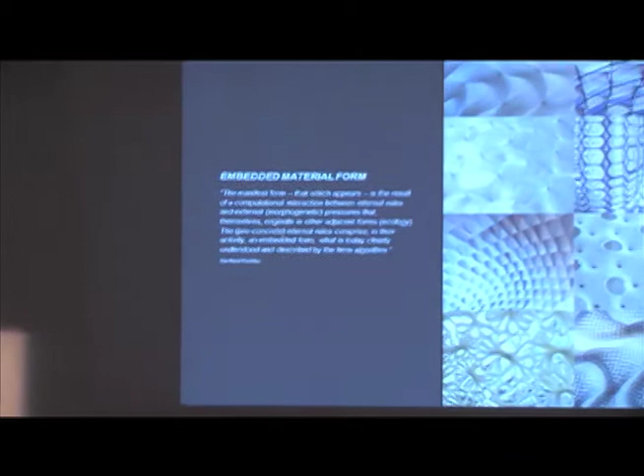Anyways, today I'm going to talk mainly on the particular research that I've been conducting at various institutions over the last couple of years, with the focus on investigating processes of design computing that are synthesized with physical materialization, in order to understand how we can use what Sanford quite nicely called in this quote the embedded form, which is the latent material gestalt in any kind of material system that we deal with, as a starting point for the design process.

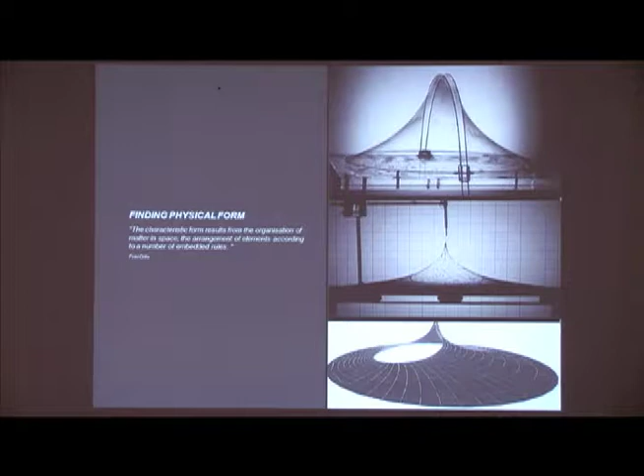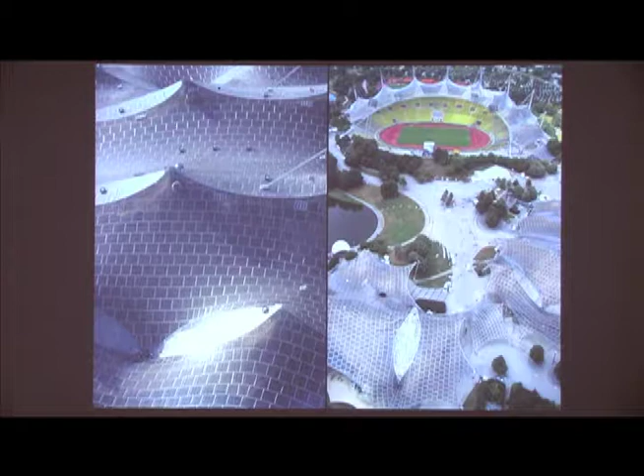Of course, at Stuttgart University, that kind of design approach, starting with the physical rather than with the digital or the imagined, has a prominent history. The most well-known person researching at Stuttgart University was Frei Otto, investigating how you can use physical behavior and the self-forming capacities of material systems as the base for a design process. Most famous are probably his soap bubble experiments, where he uses the inherent tension within the soap films to find physical shapes that at the end were at the base of his probably most famous building, the Olympic Stadium in Munich, constructed and designed in the early 70s.

So what we are interested in doing is seeing how we can extend such a design process, which conceives of form as something that comes from within the materials, something that we tease out of those materials as we allow them to have a say in the structures we create, as it is nicely put in that quote, by contemporary means. That means that we try to embed in the generative design codes that we use the physical material behavior from the very start, and also link into that the possibilities and constraints of contemporary manufacturing processes.

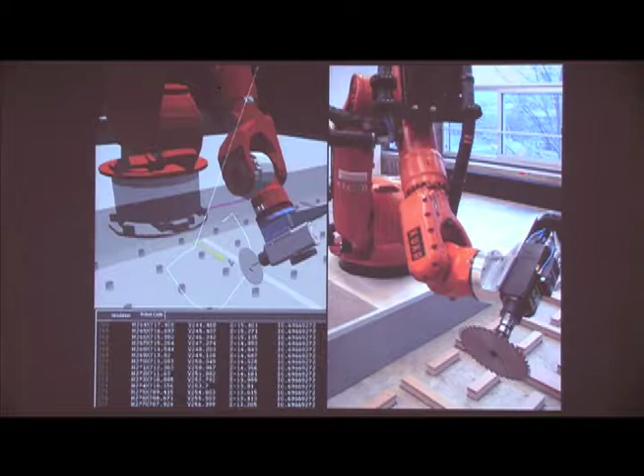So the idea is that you create something that one could call a morphogenetic design approach, in which the genotypic information is determined by the materialization constraints of the systems, and then in exchange with external influences, such as the structural forces acting upon the system or the environment interacting with the system, you can unfold a very particular material gestalt.

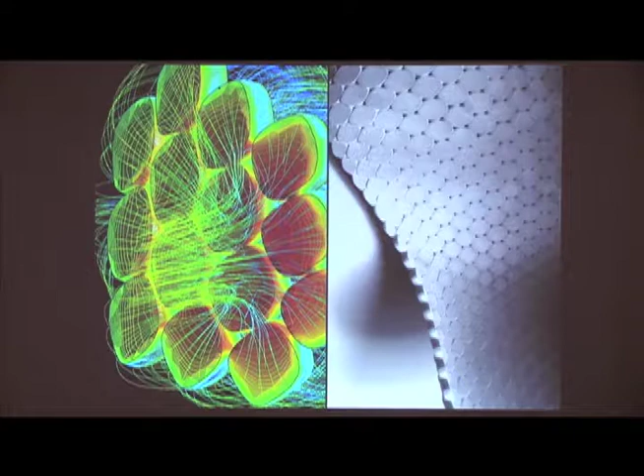Now, we've investigated this kind of design approach in relation to fiber composites quite a bit, and we did that in this particular case with the manufacturer of these kind of knitting machines. There are only two manufacturers that can build these knitting machines, as I am informed. One of them is quite close in Germany, and they produce these materials, which is a warp knitted spacer textile. So it's a kind of three-dimensionally woven textile.

And we investigated the capacity of that textile, while being absolutely non-elastic, to be capable of draping over very complex three-dimensional curvature, double curvature, without the need for any cut patterns, and still with full structural capacity. So we investigated that behavior, which is mainly driven by the spacer yarns, came up with a mathematical description of that behavior, which then is part of the generative design code, from which we can extract a manifold number of possible material gestalts, and also programmed an embedded simulation tool to see whether the local and the global stretch is feasible.

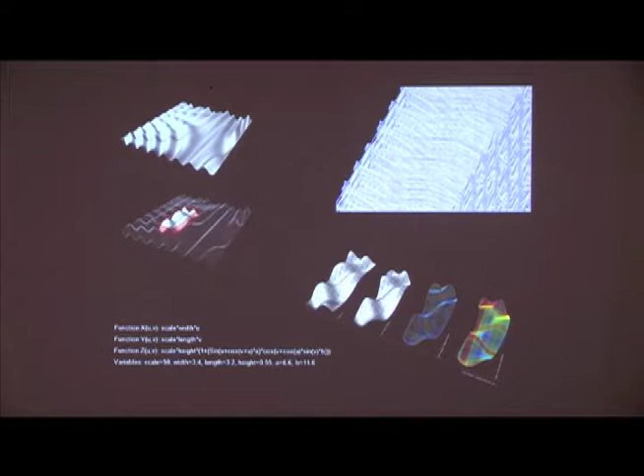And with that, we were able to construct a number of actually quite complex monoshell kind of constructions like this furniture without actually the need for larger formworks. It's just all driven by the material behavior itself. A number of kind of more complex arrangements, a number of shells bonded together. Here you can nicely see how the kind of microstructure actually determines the shape of the macrostructure.

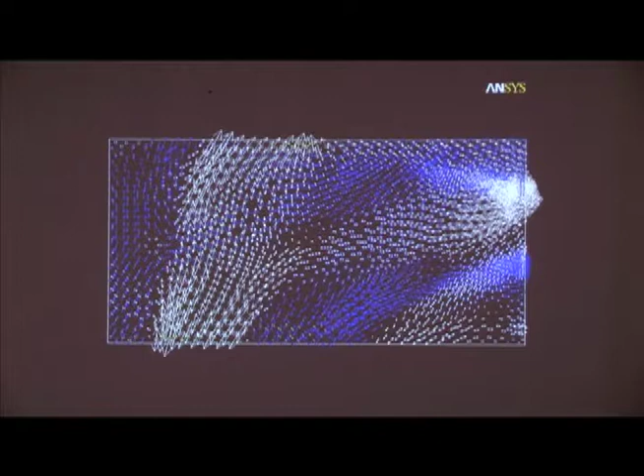And then we went on to also intervene within the construction of the material itself by embedding additional threads that, by simply pulling them, allow the material to self-organize in fairly complex fashion. And if you calibrate that with the forces traveling within the material, you can actually create highly complex, very articulated composite structures, which are as simple to construct as just pulling a couple of strings. The rest is just happening by the material itself, and still forms, mainly due to this kind of secondary undulation, incredibly stable and stiff shell structures.

And the same principles also work if you have a closed, completely watertight composite skin on the one side. So what makes composites interesting for us is you have a hierarchical build-up. You actually blur the boundary between constructing a structure and constructing the material. And you can actually design the behavior into the system.

So in order to be a little bit provocative, I thought I'm going to talk about a different composite today, which is probably the oldest composite we know, and that is wood. Nicely stated by Frank Costin, wood is God's own composite. You wonder, who the hell is Frank Costin? That's the guy that actually designed plywood airplanes in the Second World War, then went on to design race cars with plywood chassis that were actually pretty successful in Formula 2 racing. So he knows a little bit about wood.

What is interesting about wood is that it's actually pretty much a high-performance natural composite system where the cellulose microfibrils are the reinforcement and the lignin is the matrix. Unfortunately, we've lost most of the understanding of how we deal with this high-performance composite due to industrialization, which dumbed wood down to being a dimensional building element. I think in this country it's emblematic that you don't even call it wood, you just call it 2x4, which is not relating to its anatomy, just to its external dimensions. Who the hell cares what the microstructure is? We do, in a certain sense, and I'll come to that.

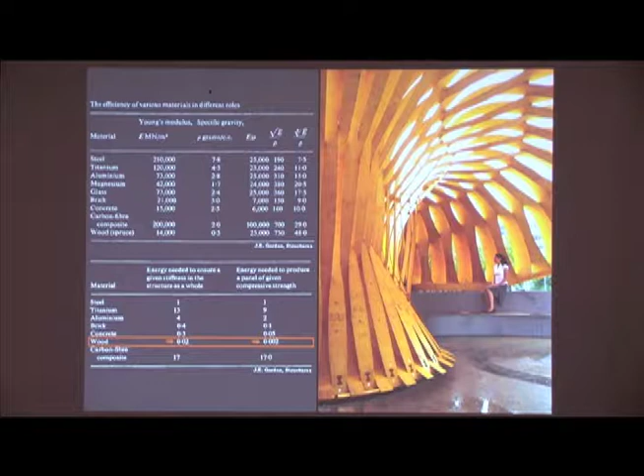So what I'm going to show is how we can exploit the possibility of thinking about wood as a high-performance, fully renewable, naturally grown composite material in a different way when we begin to take material behavior as the starting point for the design process. So in architecture, there are only very few cases where this kind of elastic bending behavior has been utilized, despite the fact that you can get quite considerable structural benefits from it.

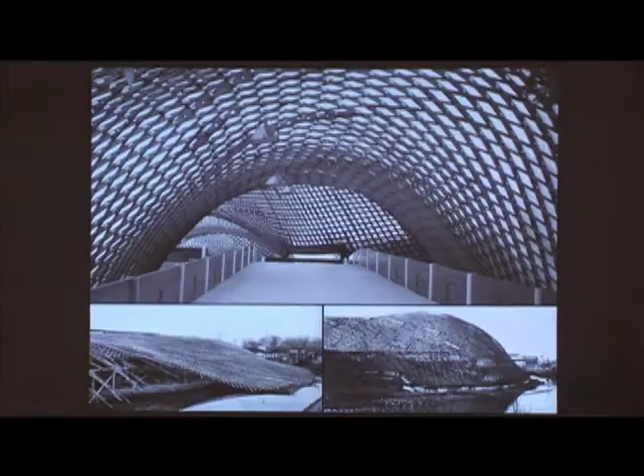One is the vernacular reed structures by the Madan people in the south of Iraq that were able to modulate the behavior of these bundles by the number of reeds and the way they taper towards the top, and built a whole number of building typologies from that. And then the other is a Frei Otto construction technique called the wooden lattice shells, which are built as completely regular planar wooden lattices, and then if you just jack them up on a couple of points, you can see the whole thing settles into this extremely versatile double curved shape completely by itself.

It's just sort of the elastic behavior of the wood. You just need to tighten down the joint points, and you actually need to secure the perimeter bearings, and the whole thing is incredibly stable. It's just 2-inch by 2-inch wood pieces.

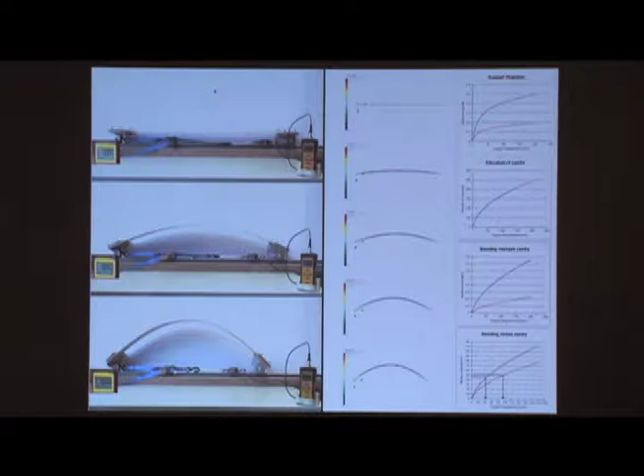So we started our investigation by actually doing physical tests of the material to be used, elastically bending it and calibrating that with the simulation tools we were to use. That brought us to a kind of form finding simulation, which you can see here, which explains the principle of the system. You have actually two plywood strips.

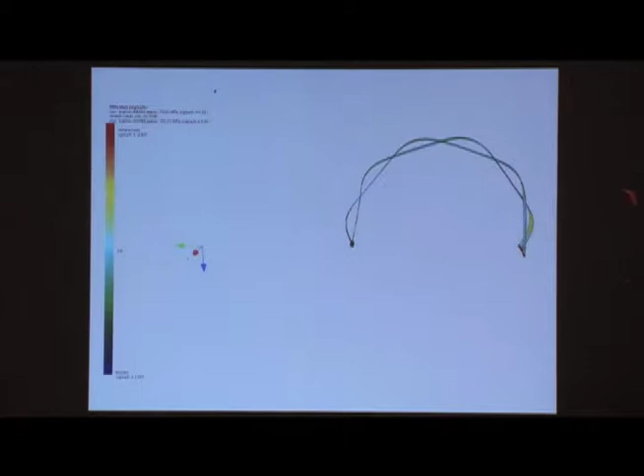It's birch plywood. These plywood strips are actually bent, and they're not globally bent as in the Frei Otto case, but they are locally bent so that the strips are alternating. Here you can nicely see that again. Strips are alternating between elastically bent and tensioned regions. You may know that wood is actually particularly good in tension when compared by weight to structural capacity ratio. It's better than steel.

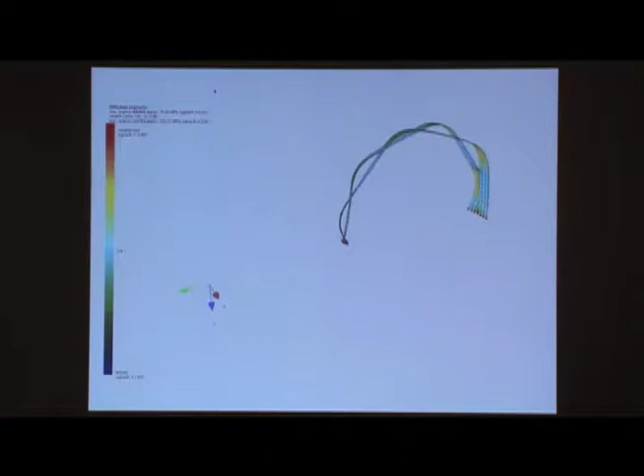So here you can see that again. You could say it's a kind of multiple arched bows connected, which have a particular weak point here, and we found a specific way of dealing with that, which I'm going to explain later.

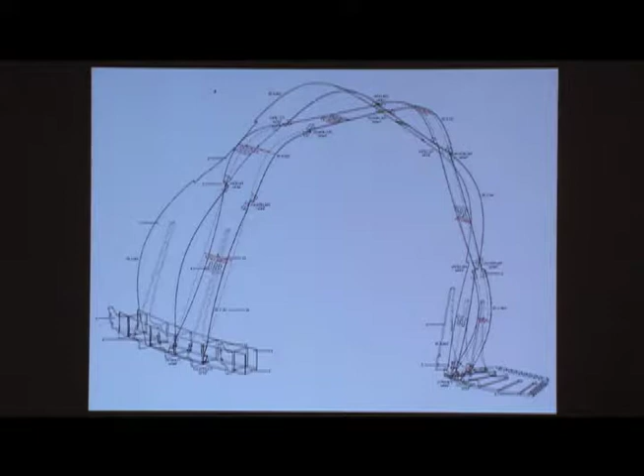So the second aspect, having understood the material behavior, is how do you actually introduce the fabrication constraints. Because this needed to be produced on an extremely low budget, we had to produce everything with one tool on one machine, and that's this 6-axis robot we have in our laboratory, where we investigated the degrees of freedom that this machine has and developed all the details to be machined in one go, because there are 500 pieces, so time was also a consideration. So you see these strips to be elastically bent.

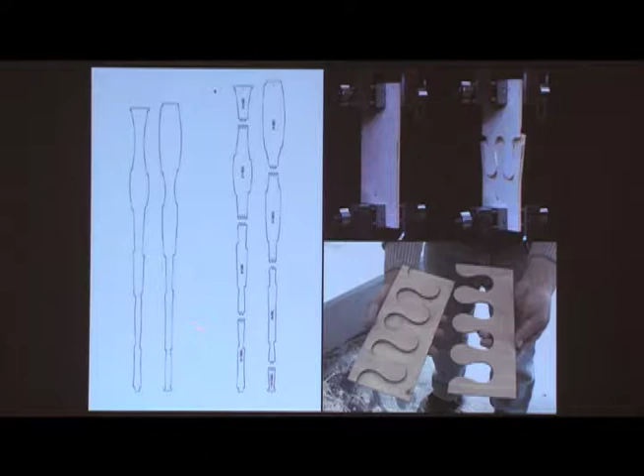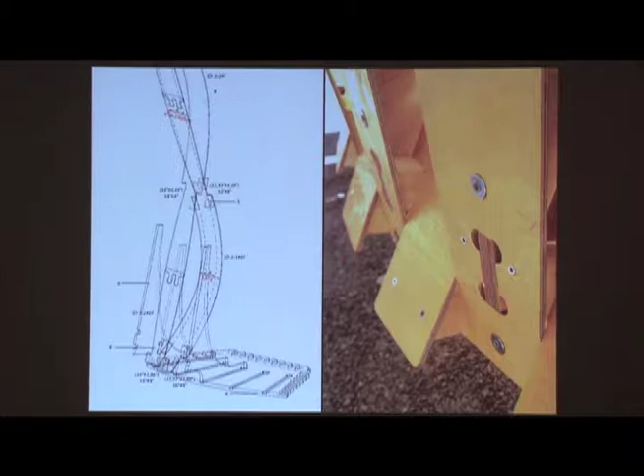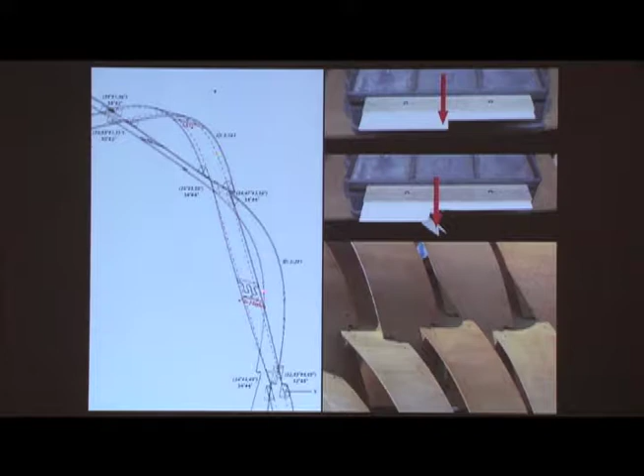They're connected in the tensile region by a joint that we developed. Another detail is obviously the way the thing meets the ground, being so thin that moisture actually becomes a problem. And then the third critical detail is the connection between the strips. This is actually where the weak point of the system is, because here you can see this is where the two strips cross, and you have zero structural depth at that point.

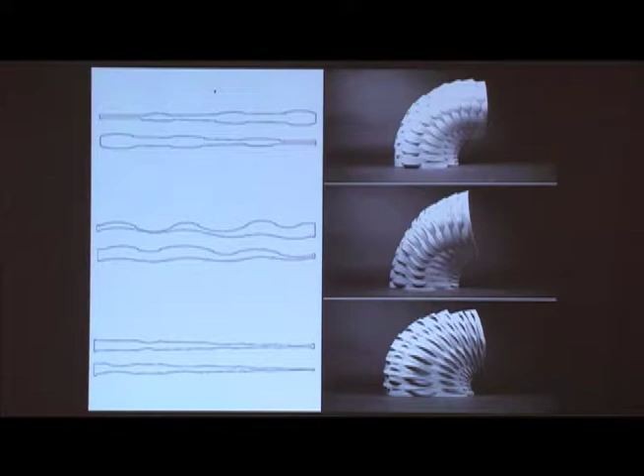Another parameter that drives the articulation of the strips is the translucency or transparency of the system, being an almost closed screen that allows for indirect illumination, as well as artificial lighting that exposes the light to the outside.

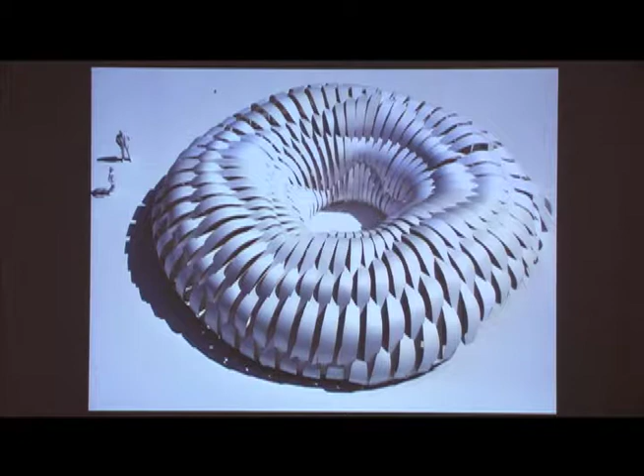So I come back to this weak point, and we thought about how we can use irregularity in the system to make initially weak elements pretty strong as an overall system. And the way to do that was actually pretty simple. A simple strategy is to offset these connection points and make them undulate around the structure. By that, while the local weak point is still there, it gets distributed in the system, and the overall system is actually very strong.

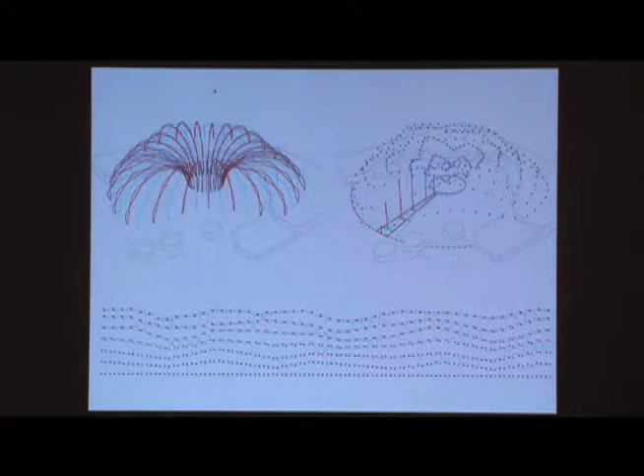So that was embedded in a computational code, which then distributes these connection points in a very irregular, structurally optimized fashion. And here you can see the verification. This is the material simulation of the overall system. It starts with the planar strips, bends them up, and then does exactly what's going to happen on the building site, just connects the individual pieces, and by that, the whole system finds an equilibrium state by itself.

So manufacturing data is an integral part of the process, so we could mill these 80 strips very quickly. You can see the robot here, and then that's pretty much the building site. You take a couple of students, very lightweight strips, and then literally the material finds the form on site by being connected in a fashion that is determined by the joint points.

So in the end, you get this kind of semi-interior extension of the public square at the city center campus of the university, in which the envelope and the load-bearing skin are all constructed from this extremely thin plywood material.

So actually, all the elements have a thickness of 6.5 millimeters. That's a quarter of an inch. And that's the whole structure and the envelope.

I think what was very interesting for us is that when we discussed the project initially with Frei Otto, obviously one of the problems of this kind of composite is that it creeps, so it loses tension over time. So we were very keen on understanding how that is affecting the lifetime performance of this. So what we did is we scanned the pavilion a couple of times, first when it was immediately erected, and then also after a couple of months.

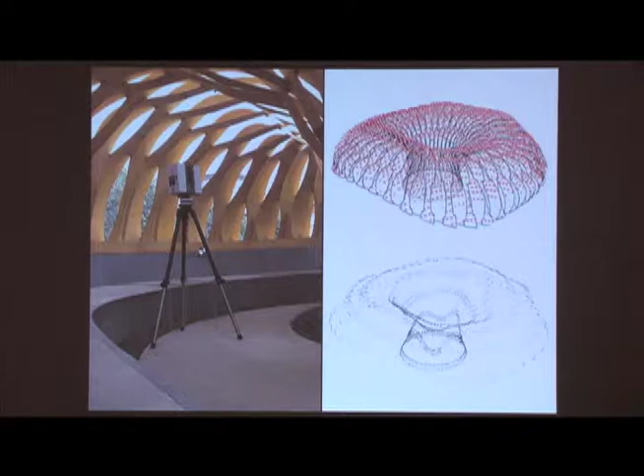And we were very pleased to see that, first of all, when it was built, the form found on site was incredibly close to the form that was found with our computational design process. And even over a couple of months with a lot of humidity cycle changes, it continued to keep that kind of inherent tension. We're also working on a number of ways of intervening with wood on the microscopic level.

So we developed, for example, at the GSD, a way of scanning the wood pieces we use and then erasing with the laser cutter only the early wood parts, because they don't contribute much to the load-bearing capacity. Or we recently also investigated how we can blur the boundary between the organic and the synthetic composite by using chemical procedures to replace part of the wood with plastics. So here you can see the same process. The early wood is replaced with another kind of artificial substance.

The second project I will quickly show takes advantage of the second interesting material characteristic that wood has, and that is its hygroscopicity. So that means it's responding to changes in relative humidity in a real-time fashion. So in many ways, it actually is a smart material. That is, again, due to its fibrous makeup, where on a molecular level, the water molecules are getting attached to the cellulose fibers, and by that, wood swells.

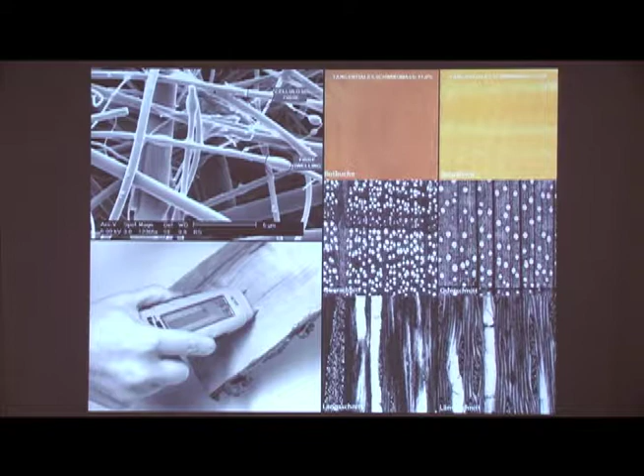So we thought, how can we actually utilize that behavior, which we usually try to get rid of? Within a low energy process anyways, we spend 70% of the energy in wood processing just to make sure that wood does not respond to changes in relative humidity. So we thought if we leave that kiln drying out, what can we do with this kind of behavior?

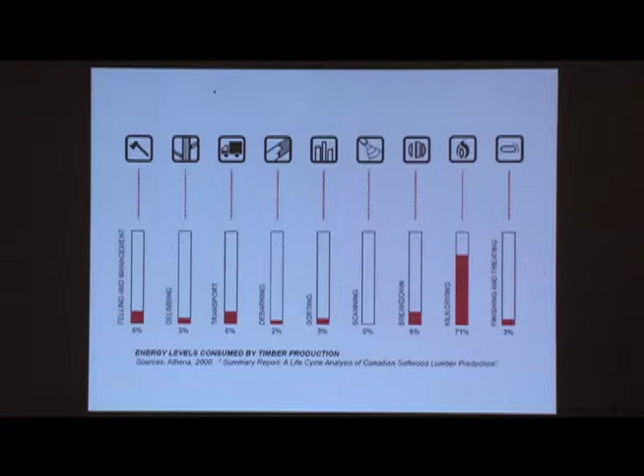And obviously we can utilize the hygroscopic dimensional change in order to trigger a shape change, and that could, for example, allow us to construct an environmentally responsive surface structure that adapts to increases in relative humidity by ventilating, automated ventilation. A system that we know does exactly that is the spruce cone.

The spruce cone is growing in a wet, moist state, a high moisture content, actually at fiber saturation point, and then it dries, and once the environment has reached suitably dry conditions, it opens, seeds are released, and that's all embedded as a material behavior within the fiber structure. Funny thing is that obviously the spruce cone just needs to do this once, but it works perfectly over 500 cycles. Tested that actually a lot. So here you can see that again, moisture content decreases, and by that the scales open.

So we developed a composite of natural wood veneer and a special composite layer that allows us to mimic this behavior using very cheap wood as a starting point. And here you can see that this is the simple material element. Here you have the changes in relative humidity, and you see an autonomous shape change just by itself. You can program that shape change, so you can make it move this way when humidity increases or make it move the other way. It all is dependent on the parameters of manufacturing the piece in particular conditions.

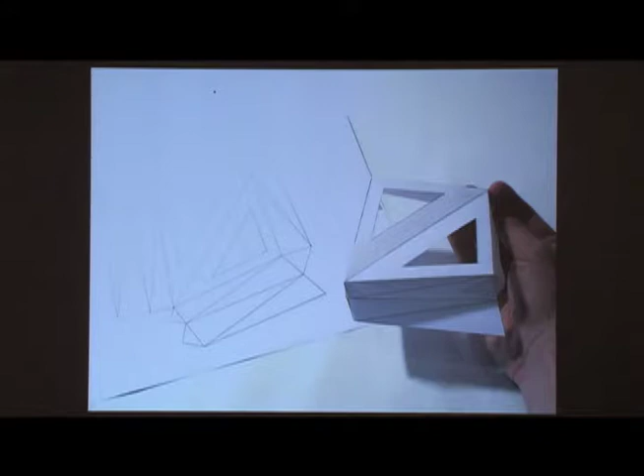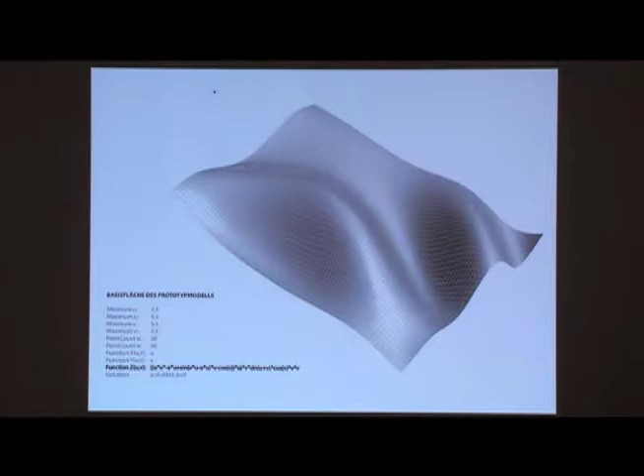So we then went on to design a substructure for that, which is a simple folded one-cut thing. We looked at the interdependencies of the thermodynamic influences on the distribution of moisture in relation to the morphology of the system, developed a set of components from that, used a mathematical equation to drive the subsequent surface evolution, which happens in constant feedback with thermodynamic and structural analysis, which led us to this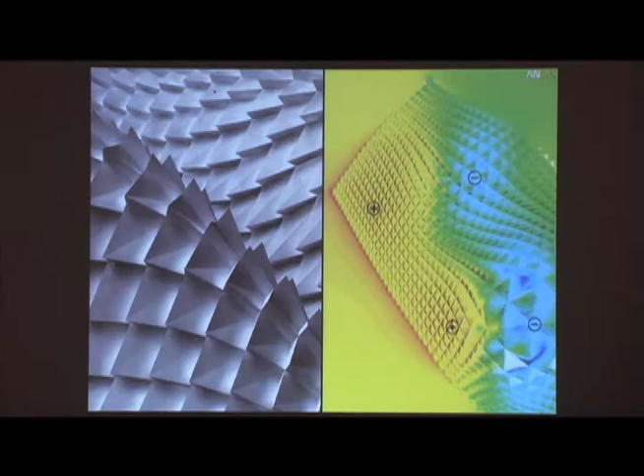prototype, which, despite the high level of articulation, we could build immediately as a functional artifact, which actually changes its porosity with changes in relative humidity. So here you have a system that is actually fully environmentally responsive with no need for any additional electronic or

mechanical control. We were not entirely satisfied about that because the division between responsive structure and the actual load-bearing structure and this overriding underlying UV parameterization of the surface didn't make us very happy, so we went on to redesign the system based on a component in which the structure and the responsive part is one piece. It's just that the responsive bit is very thin and the structural part is much thicker.

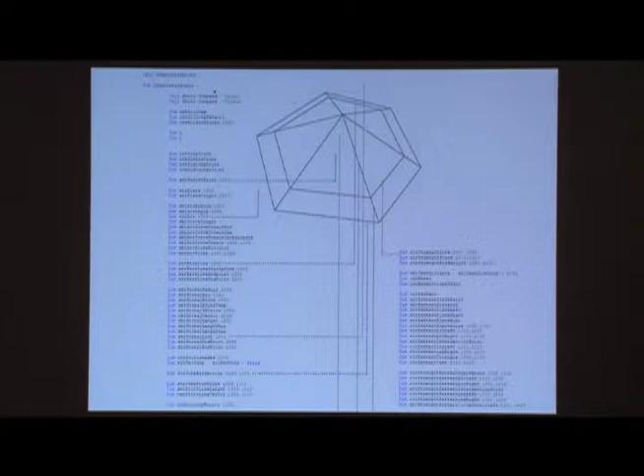So what you see here is an incredibly simple, incredibly cheap, environmentally responsive system in which the sensor, the actuator, the regulating element, all is just one very simple wood veneer piece. Currently, we're trying to convince the city of Frankfurt that they need something like this. I think in California, you don't need it.

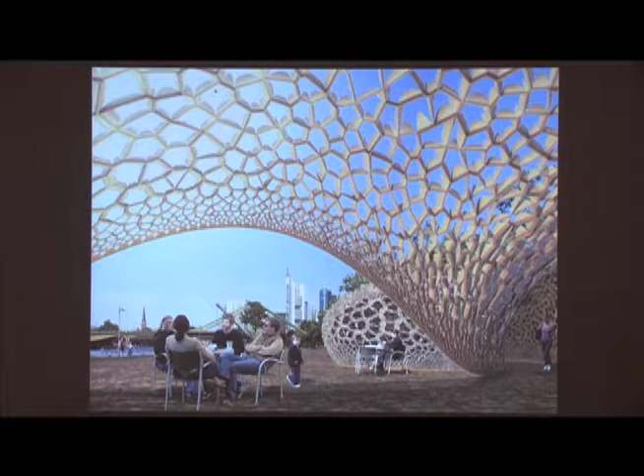To build a pavilion that is closed in high humidity level, rainy weather. And once the sun comes out, humidity level goes down, it just opens completely by itself. And that also allows a qualitative experience of these environmental changes that always surround us and are in direct exchange with the material behavior itself.

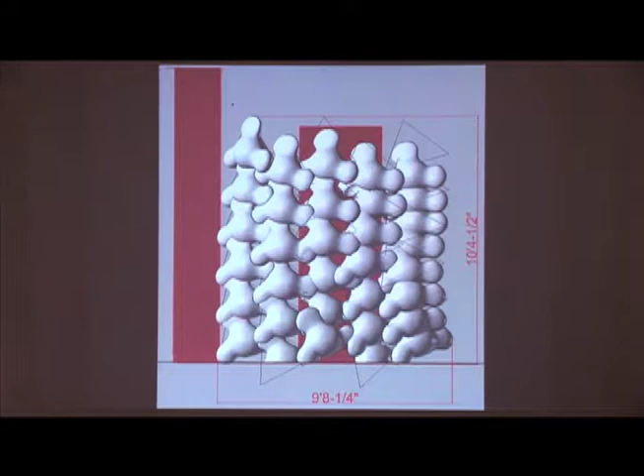Machineous is a fabrication production environment that is simply focusing on the utilization of digital motor-driven tools. In this case, only robots, automotive robots. The reason why automotive robots: they're beautifully well-functioning designed digital tools. They are available right away, so we didn't have to design any machines to get started.

They incorporate already a lot of concepts of efficiency, shop efficiency, production efficiency, strength, and accuracy. The automotive industry has done this already for us. We only need to find a way to take the architecture, furniture, and produce it with robots. Having done 10 years of fabrication with non-digital tools, like human labor, it's very clear that using robots is really about not using labor.

That's what cars do. Our challenge in this company is to move as much of the effort to produce a component, a piece of furniture, to the machine, so the machine can do as much as possible, so all your effort as a human is eventually left mostly in the assembly, in some finishing, which is a highly complex operation that takes a lot of trial and error programming, figuring out how to program a robot to do sanding, something very complicated, or painting, to achieve the finish that you see with your eye.

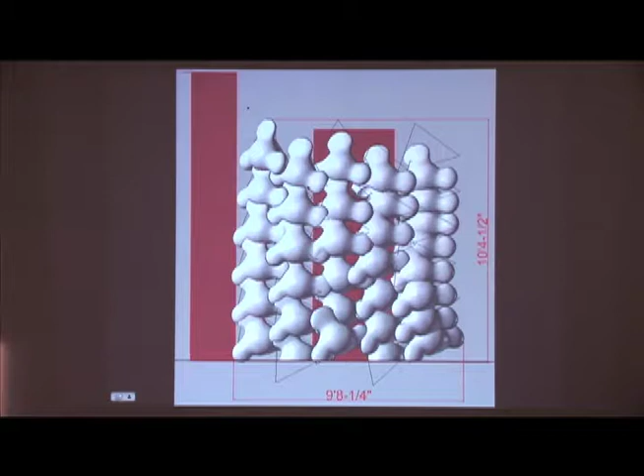So having a model, it incorporates everything we need to do, which is about these cut lines to join these plastic bricks. So we're using all different softwares to establish our data, to manage our data that's then being fed to a robot controller, and the robot controller converts this all into a 6-axis motion that does the job. It's really hard to intuitively think about a robot's motion, but that's what you need to use. There's some testing involved so that you have successful motion, and then there's some simulation.

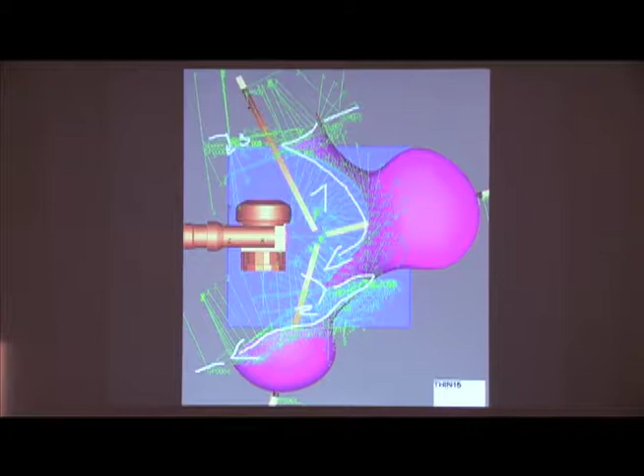This is actually a software that simulates a robot within a digital environment. So you have the same robot in there, and you generate the path within the software, which in this case is always normal to the surface of this plastic brick, and manage the order of cuts. These are extremely complicated cuts. Here's how it actually happens, how this robot will follow, always normal to this more or less spherical part.

And the cuts you see are always different, highly complicated to do by hand. It's almost impossible to map a path like this onto a shape like that. And this gets even more complicated, as you will see later. But we're treating it like it's always the same, which is important to be efficient and to be on time, on price, and to somehow fit this into a market approach, so that a client can actually pay for it. So after cutting, you assemble. When it's assembled, you get this giant wall.

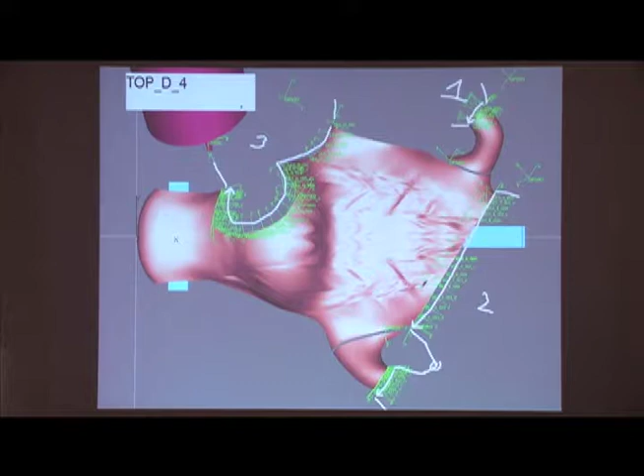We moved forward into another level, or Greg chose to, really use toys rather than appropriate toys. And here the problems get even bigger. Cutting, these are really complicated parts to operate on. So the challenge is simply, how do we manage, how do we create the data, and how do we keep control of what the robot is going to do for us.

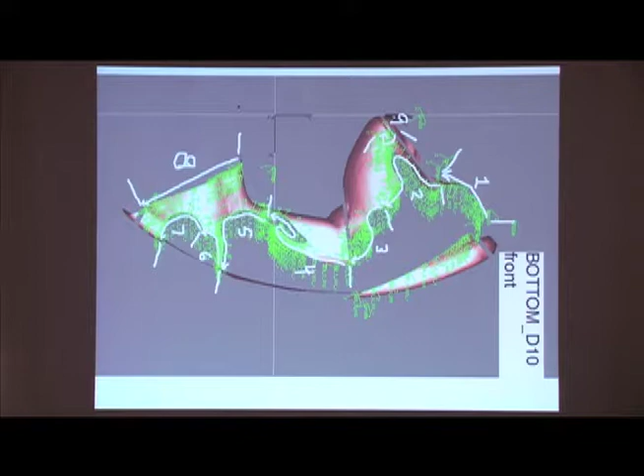After assembly, it's usually just a process of labor, just skill, simply being able to work with your hands. This gets extremely complicated when the part gets even more complicated. And then you put these pieces together. We then moved into even larger, the most recent, these large fountains, which are hundreds of parts joined into this large composition. Tolerance becomes a major issue to bring all parts together all around.

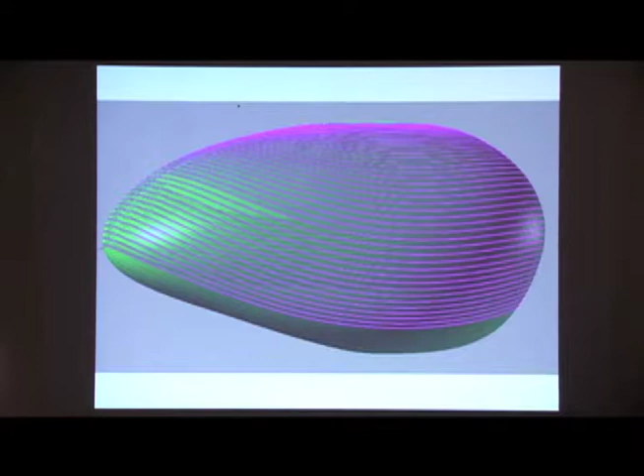Another project that appears to be much simpler, but it's as much of a challenge in programming, is these pebbles out of plywood, where the idea is to machine the whole pebble with one motion series, one batch, like you mill around. The way we did this is that all we have to really make sure is that the robot can always reach over one hemisphere of plywood. So we had to generate some sort of control surface system that would give us the normals for the bit to point properly to the part.

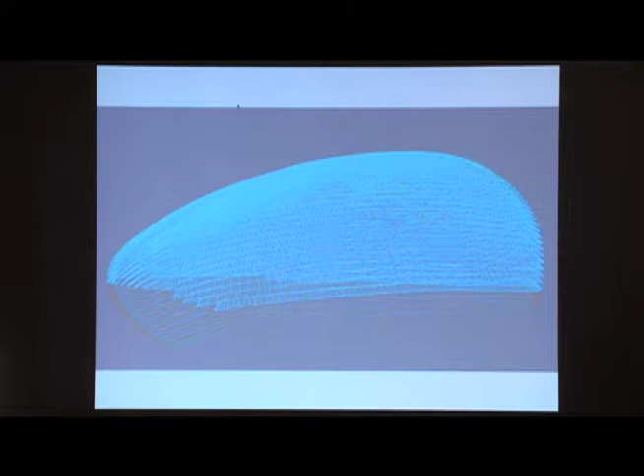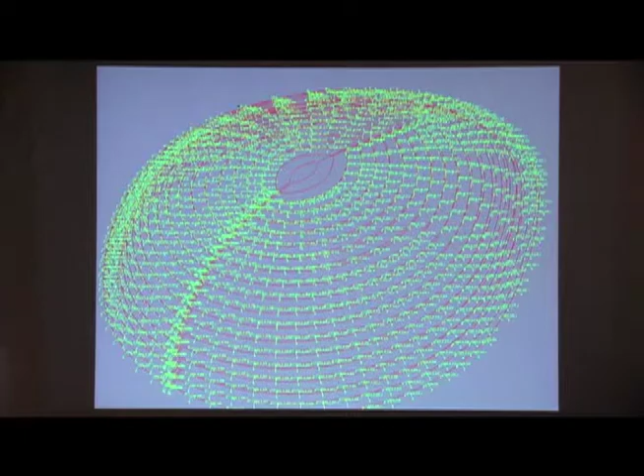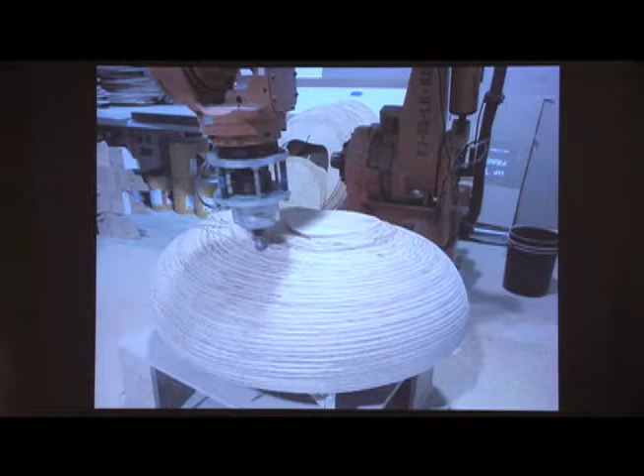And then you have a series of these control surfaces. This is with points turned on. So you have thousands and thousands of points in space that need to be delivered to a robot. We don't really look at these points much. We're just amazed how much is actually needed to accomplish something very simple like this. A stacked plywood stock that then gets machined. In this case, you can turn this on, walk away for 4 hours, and it's done.

It's a major difference between non-digital fabrication and digital fabrication. That's really what it comes down to, that you can walk away from it while it's actually working. And then we'll finish this. This is then again the labor part, putting the gloss coat on.

A similar project does the same thing again with a different shape, breaks it down into a plywood stock, and machines it. In this case, we actually did this in 3 days, the entire process from receiving the design, cutting the plywood sections and milling the part, to assembling it into this final object.

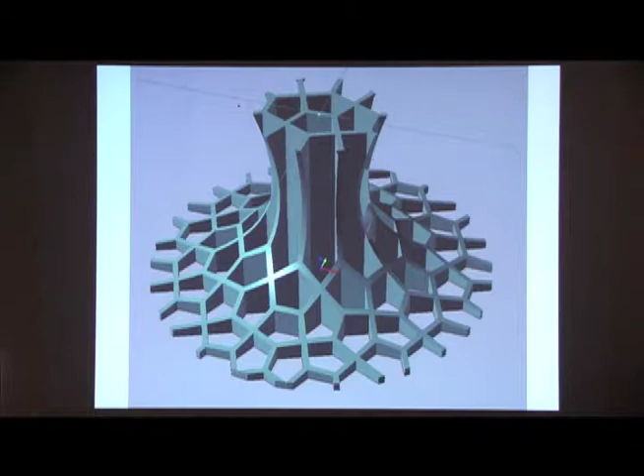Another furniture project that appears rather simple, but actually I believe this is almost impossible to do without a digital tool, is a honeycomb table base cut in a tulip shape, a torus. Once you have a digital model, again, we have to design the motion path of the robot in three dimensions. There is no automatic software. It's because it's so complex to be efficient in relationship to material.

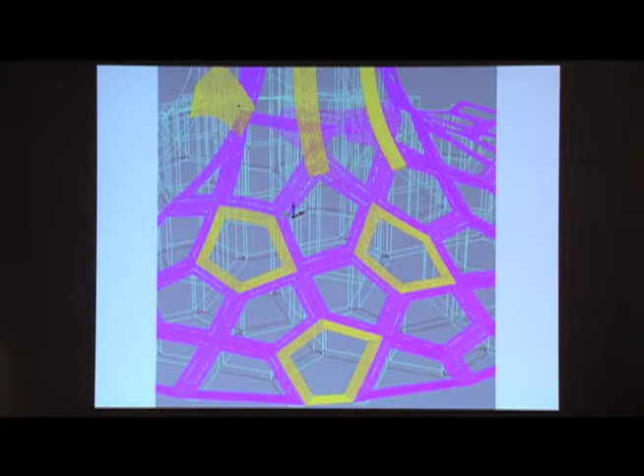We have a major issue with this project of grain. How do you cut in direction to the wood grain, not to destroy the wood, to achieve this very clean, finished product?

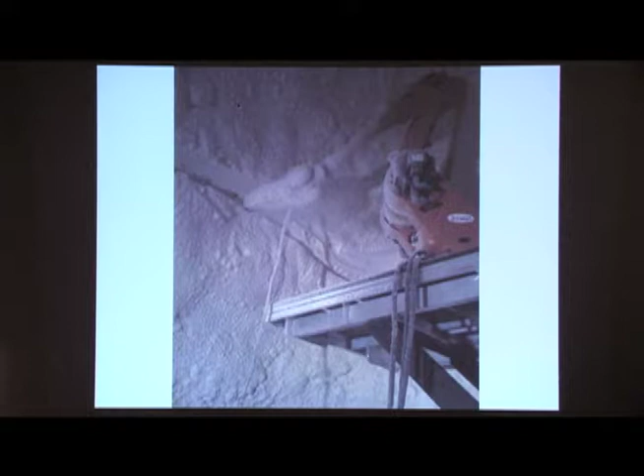Another project that you may have seen was very recently, for us, a major deal, to take a robot to the site. And this was for Patrick Tighe, his latest exhibition here at SCI-Arc, where we used the robot on site and carved the interior of the space based on a complete digital setup.

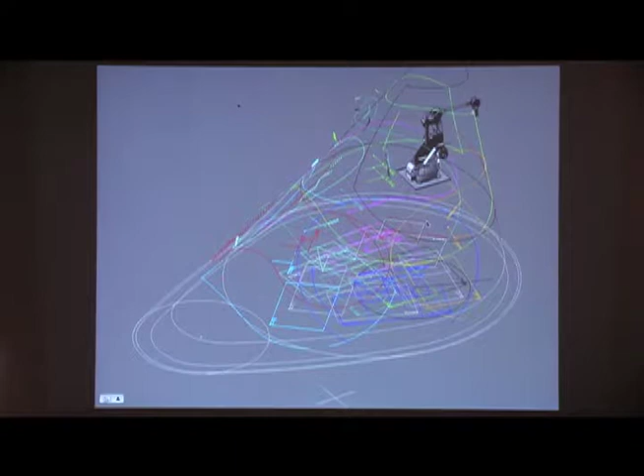Everything was anticipated in a computer, and without any testing, we went directly to the site, stood it up, put it in these positions, which you kind of see on the bottom, and elevated, and executed the motion path of milling these panels. And that was the result, after about 2.5 days of work, carving through inches and inches of foam.

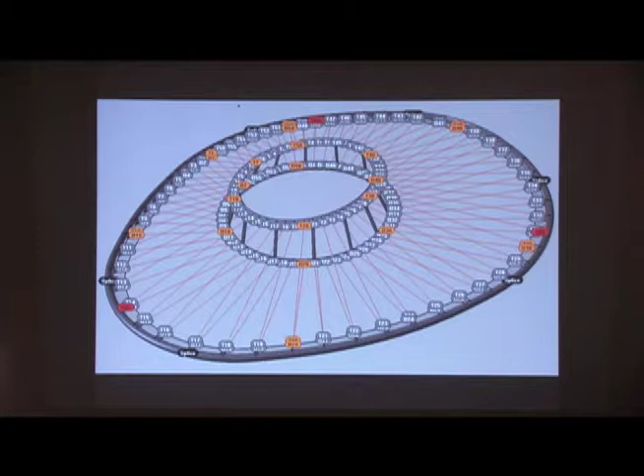Another project that was done here for SCI-Arc, for Hitoshi Abe, and now a much different, greater scale. Here you have a design, a perfect computer model that includes all the components, all the gussets, all the parts, all the cables, everything. For us, what was left was to produce the components, the parts, that then with assembly make the whole.

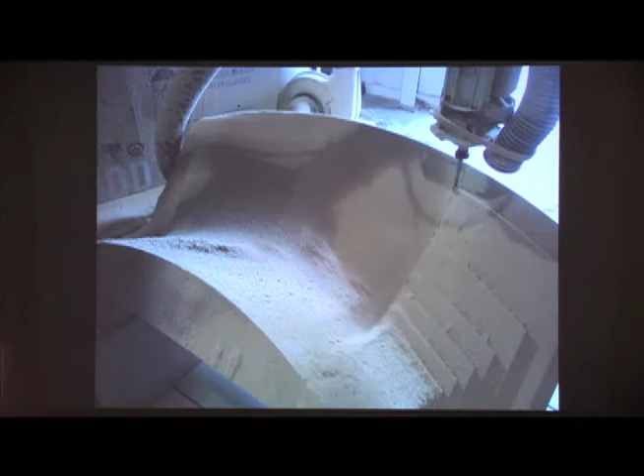And here's some mold making involved because there's some fiberglass work needed for the inner shell, that then is digitally cut out. It's a lot easier than to do this with patterns, or almost impossible to do with a pattern. It's complex surface fiberglass parts.

The tubing that was around the hub and the compression ring is pre-rolled material, and digitally we cut that. We dimension these pre-rolled parts with the robot. So we have them set up in front of the machine, chop the ends off of the units, because the outer compression ring is not a circle; it's kind of a free form made of 14 different parts. And at the same time we produced a jig for positioning all these gussets.

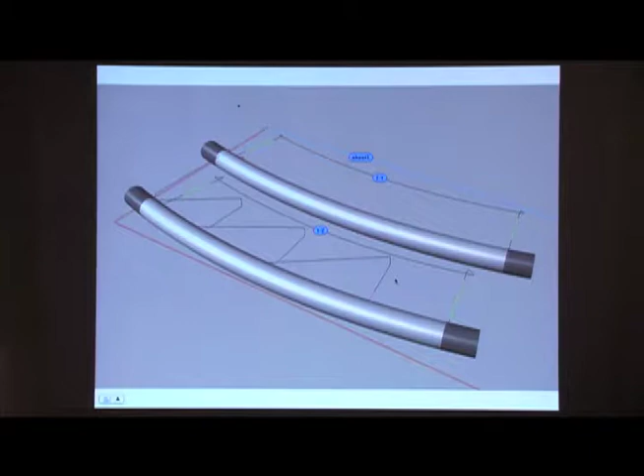So it's literally a straight translation from the original computer model into a setup and into an operation that then achieves results in these parts. And there's nothing ever measured. There's no drawing ever made. And again, going back to non-digital fabrication, just an enormous difference. A drawing, a dimension, having a guide, dimensioning pieces, positioning pieces with a measuring tape is an unbelievable difference.

It's something that doesn't really seem to be such a big difference, but to us, making it and pricing it, it's enormous. And then you achieve the project at the end.

And the last project I'm going to talk about real quickly is the facade project for Tighe also. It's 125 panels, 36 designs. It's a very straightforward project, but benefits from a digital process, of course, enormously. There's no limitation in pattern and design, really.

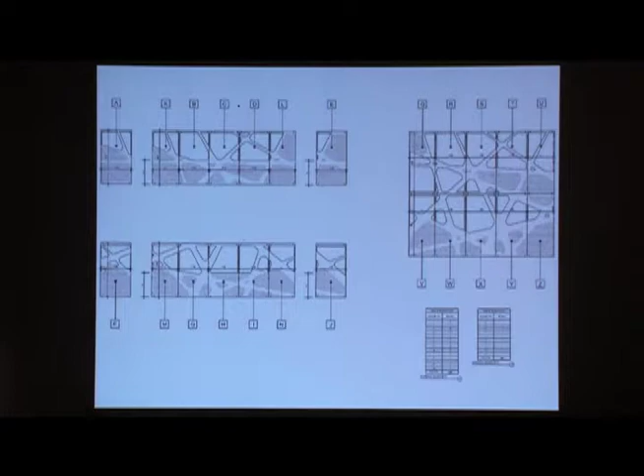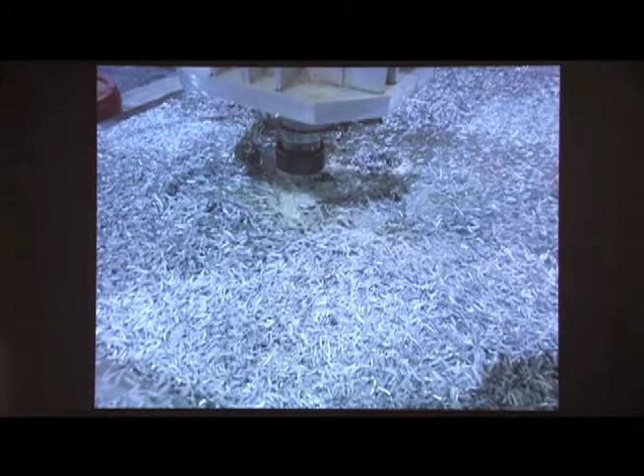We just have to literally take the 2D design and follow the cut and make sure that we know what it takes to mill through aluminum. And that has implications of how you program, the speed, how many points, the accuracy, how many passes you can mill down, and the nature of treating aluminum.

So to finish this up, we're pretty much tied in. We're in this really hands-on situation where design is the desire on the one side, and it shouldn't change. It's majorly important to me that we don't go back to the architect and say, you got to change this. This is not going to happen.

On the other hand, we have material and efficiency in initial programming, because that's what you really pay for with one-offs. If you mass produce, it becomes a non-issue, but if it's small production or single objects, it's a major player, because all your labor is in front of the computer rather than out there cutting patterns, or plotting a design out and getting going.

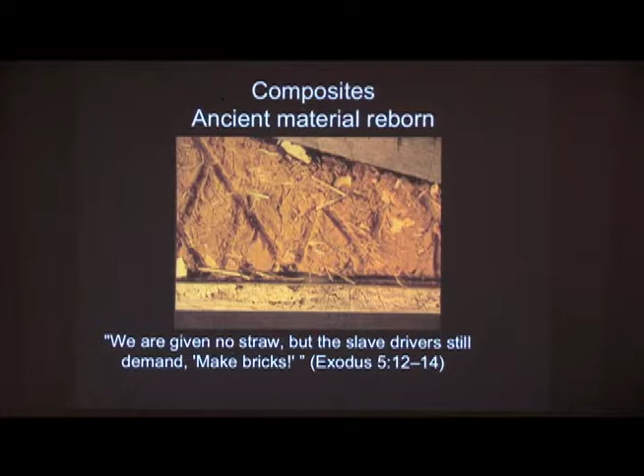And I used to think that was the earliest use of composites until we did a job for the American Museum of Natural History, where we were working on replicating and enlarging an oviraptor egg found in the Gobi Desert, which turned out to have been in a nest made of mud and straw by the dinosaur. So it's a pretty old concept to use reinforcements and matrices.

But it turns out that if you use more and more efficient fibers and more efficient matrices, you get higher and higher performance until finally you get into the kind of things that Professor Meyer was talking about and Kurt Jordan, very advanced composite materials, very strong, very light, and very costly.

And our role in my little business, ever since we started it about 1980, has been to try to find ways to use this material in the built environment in today's world for purposes that are cost-effective and useful. And early on, in addition to movie sets and theater sets and signage, we also stumbled across the fact that composites can actually pretend to be something that they're not. They actually do a pretty good job of mimicking other materials.

And so for a long time, architects knew fiberglass as a cheap alternative to the real thing when they couldn't afford the real thing. That's an example of a building. The bottom 15 feet or so is all FRP, replicating a terracotta building. There's a friend of mine who has a company in New York who takes you on a tour of Manhattan and can point out 14 linear miles of FRP cornice as historic replicas of the original terracotta or sheet metal.

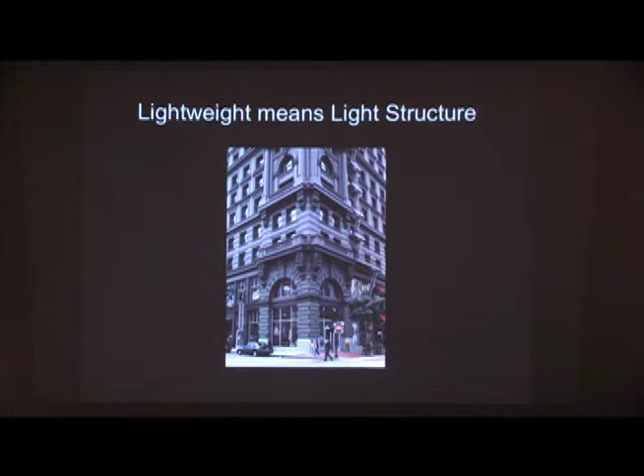So they're heavy, they're massive, and we have been sort of working with gravity as a component of construction that doesn't really lend itself to needing anything that's very light. Our materials are heavy, and so we work with them.

However, this building, being built in 1906 with a hand-carved limestone or sandstone facade, wasn't strong enough to meet the new building codes. So all that structural steel that was behind the original stone, which was strong enough at the time, wasn't strong enough if they put back the original stone veneer. In fact, even if they put back a GFRC system as was being proposed by our competitor. So the idea that an FRP system allowed the original structure to stay in place was the main reason why this ended up happening in FRP. Costs were about the same.

And that led to thinking, gee, these materials have intrinsic properties and value in and of themselves. What would be really nice is to quit trying to pretend we're something different and try to be something that nobody else can be. Try to offer something that can't be done with traditional materials. And along came this project.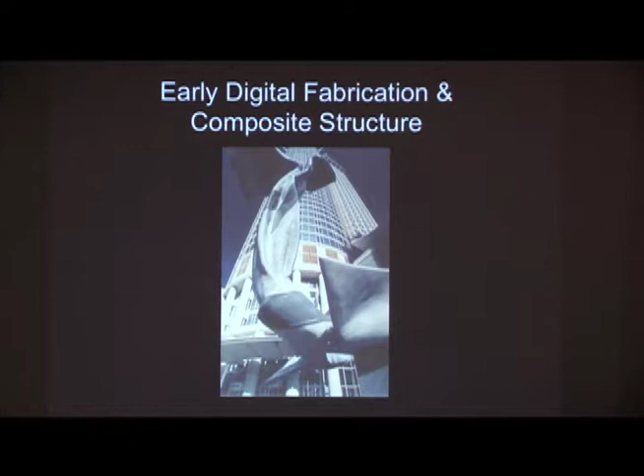The problem they were having is that the structural engineers couldn't get enough steel inside the envelope of the skin that was to be cast aluminum plates in order to make it strong enough to meet the German building codes. This is in Frankfurt. And so what we were able to do is show them that if you just forgot about the steel inside and engineered the skins of the sculpture, you could actually get to where you needed to be without a structure inside.

And as long as you design the skins properly, you could satisfy the code officials that this piece was going to work. And so that's where, again, Kurt Jordan, who we've worked with for years, came along, and he helped us develop a finite element model that was convincing enough.

And this was built with a CNC router that we built out of wood. It's plywood and had a little die grinder in it, and it was a two-axis router. And that entire model was built in 1-inch thick slices of foam, kind of what we called Petaluma stereolithography, which is where our shop was at the time. This was the first, I think, paperless project. The only thing paper on this project was the purchase order.

This was for 20th Century Fox. Alex McDowell is the artistic director, I believe, on this project. And this is a movie called Minority Report. And again, this was an all digitally generated building that we milled out of foam. And in that case, it's just EPS foam on a plywood framework that we fabricated also using the 3D data, all cut on a CNC, and in this case, a 3-axis machine.

The future of construction is rapidly becoming 3D, as you all know, although the lawyers haven't quite figured out how to keep up with that complicated problem. I was talking to Mike a minute ago about a job we're doing at Stanford, where we're required to participate in the BIM model. We're required to provide information to the BIM model, but the BIM model is not considered a construction document. So although we're allowed to use it, we're not allowed to refer to it if anything goes wrong. I think in the not too distant future, that's going to have to get straightened out because the 3D models are so much more powerful.

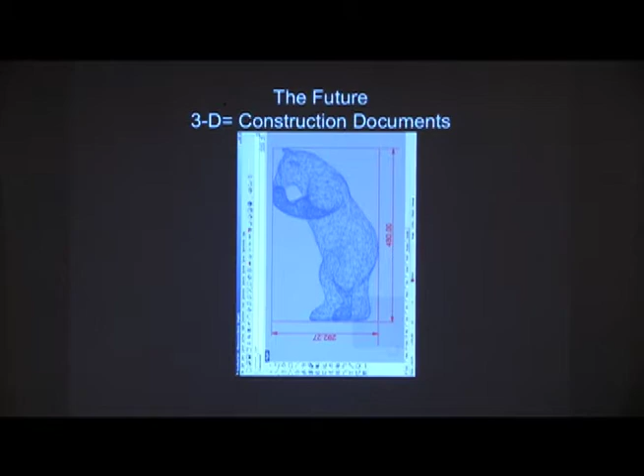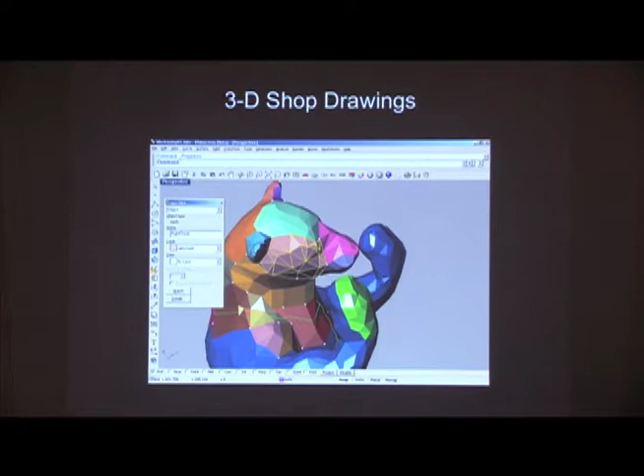This is a sculpture we did for the artist Lawrence Argent. It's in Denver, Colorado. It's a 40-foot tall blue bear. Again, it has a kind of a hybrid structural system. It has a little bit of steel in about the bottom 10 feet, and then the rest of the sculpture is an all FRP fabrication. This is basically the shop drawing approach. On the bear, areas of triangles were selected that fit into our gantry machine at the time, and then the CNC machine.

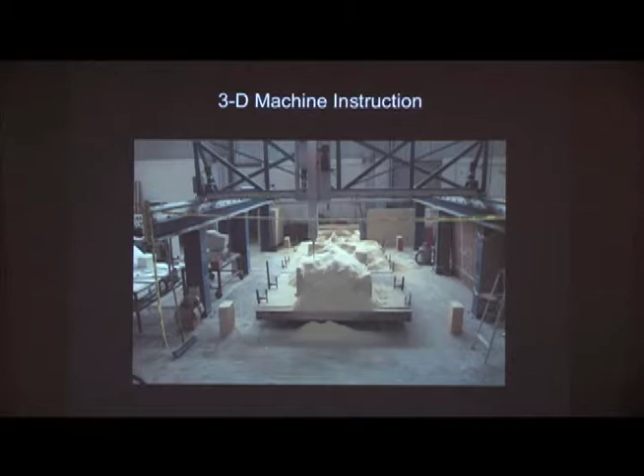This is another homemade machine that we still have and use as a 3-axis machine to machine the female molds out of foam. And again, these female molds, this is one of them. The least expensive mold making material money can buy is this expanded polystyrene foam. It's really cheap. It's recyclable if you keep it clean or try to. And it has a couple of disadvantages, one of which is that if you touch it with resin, it melts. So what we do is we just spray some water-based contact cement and put some tinfoil on it, and that produces a surface that we can mold FRP against without damaging the tool.

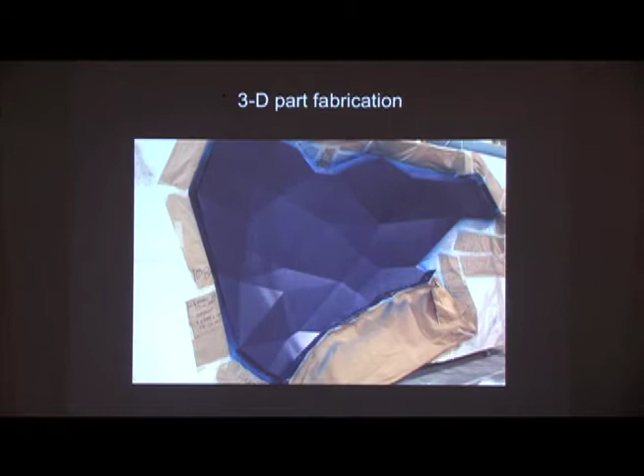And again, as long as you're only using a mold one time, this is a pretty inexpensive way to produce a female mold. Although I'm fascinated with this idea of just having a flat fabric and pulling wires and having it sort of deform into a shape. That's got to be the ultimate. I don't know if we can make a bear out of that, but maybe. I guess it's just a matter of managing the complexity.

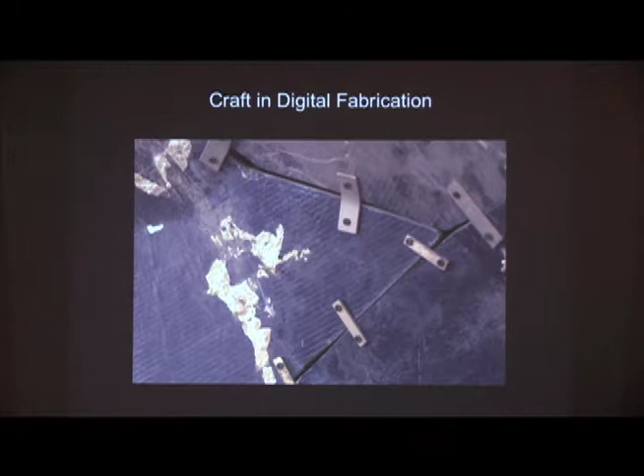This slide is here in large part because I want to remind myself how important craftsmanship is in this whole chain. We use a lot of CNC machines. We use a lot of powerful digital tools to create and realize these objects. But at some point, these things have to go out into the shop, and they have to be built, and they have to be put together. These materials have thicknesses. Oftentimes, the models that we get have no thickness. They have shapes that are too big to ship. They have to be broken up into pieces that can be handled and managed. And all of that is, in my opinion, part of the design.

And just providing an infinitely thin shell and expecting that to be translated into a part is, I think, in large part giving up a lot of control that the architect or the designer has or could have if they wanted it. But if they give it up, then it's gone to somebody else, because sooner or later it's going to have to get done. This is just an example of 3 of those literally hundreds of pixelated potato chips of panels that made up the Blue Bear. And they all had to be assembled into a form, and that wasn't simple. And there was an awful lot of craftsmanship that went into that, in addition to the magic that comes from the 3D modeling. There's the finished piece.

And it's called I See What You Mean. It's a blue bear that came out of the Rockies and saw these foreigners coming into their convention center and said, yeah, I see. So it's blue because the rapid prototyping machine that Lawrence used to make the model that he used in his presentation happened to have blue plastic in it. And when it was done, he kind of liked it, so that's why it ended up blue, despite what he may say now. There's all kinds of Native American legends about a blue bear, and he stumbled across them, and so now that's a completely different story.

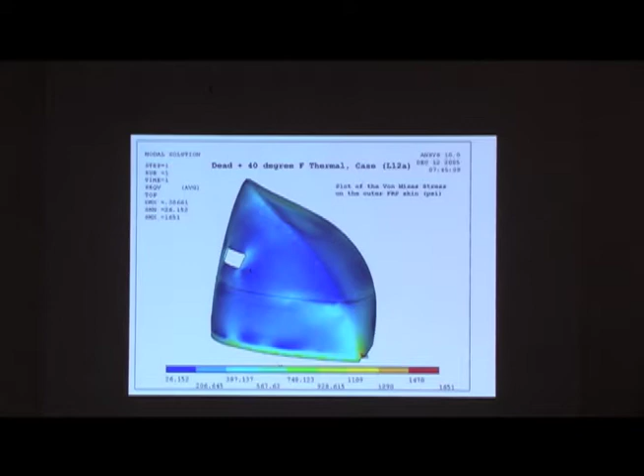The scan data, of course, can be sent off to the architect for construction documents. So this was a truly reverse engineered project where the architects took the 3D scan data and developed the construction documents, which is one of the great things about these 3D models now: architects have the freedom to start playing with these complex forms and still manage the building, manage the HVAC, the electrical, and all of that kind of thing. It's changing the game dramatically.

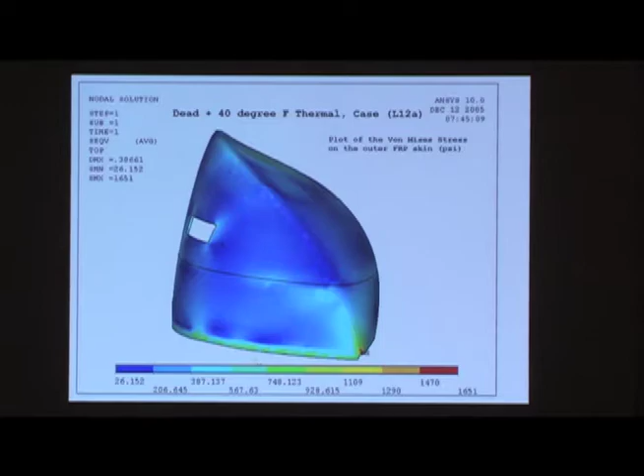But here's the 3D model of the piece that we sent to Kurt Jordan, and we inadvertently didn't tell him which end was up, so he picked what seemed to be the obvious, and it was on its side. So the first finite element models are calculations of how this building would work if it were horizontal, which was our mistake, but fortunately Kurt's so fast at this kind of stuff that it wasn't a big problem. And we got it figured out, and in the end, that building, which consists of 9 pieces, that surface is a thin 1/4 inch of Portland cement stucco.

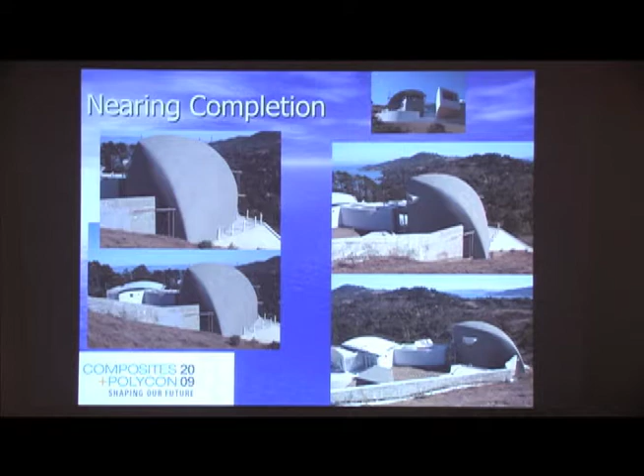Is my time? Okay. I'm done. That's the second to last slide.

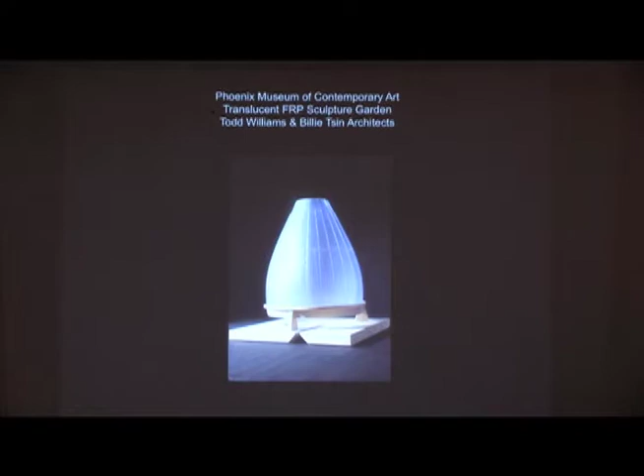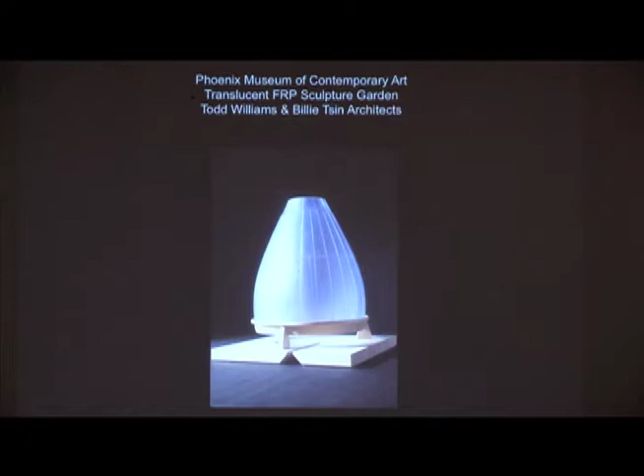That's the last slide. That's an all monocoque sculpture garden for Todd Williams and Billie Tsien, trying to get it built at their museum in Phoenix. And again, it's an all translucent FRP system. There's no metal in there, and it's naturally convection cooling. So it's where I think we could be, and we could be not too far from now. That's it. Thank you.

Thank you, the 3 of you, for a fantastic presentation. What I can do is maybe throw 2 or 3 points in reaction to what you guys presented, and then directly open for questions from the audience, and then we can break for lunch, because if not, I think we're never going to make it out of here alive.

So it seems to me like the three of you represent 3 different angles on a similar table that everybody in this room is trying to establish another conversation around. So, 3 points that occurred to me. First, historically, design, architecture, materials, fabrication always have had a kind of symbiotic relationship. But it seems like in recent time, through the power of computers and some other elements, this notion seems to be collapsing almost into one territory. We are not quite there yet, but it seems that design, assembly, fabrication, design effects, design methodologies, and fabrication are coming closer and closer.

And I think it has to do with the tooling and the translation, but also I think it's changing what I would call the ethics or the ethos of how we operate in relation to that. And I think the 3 of you represent different ways, because, for example, Andreas, the way you work is in close collaboration with the designers and so on. Bill, a little bit like that, but also more established in relation to, I will not call it traditional fabrication, but it is embedded with that. Whereas Achim has much more to do with the design ambition and design sensibility and so on.